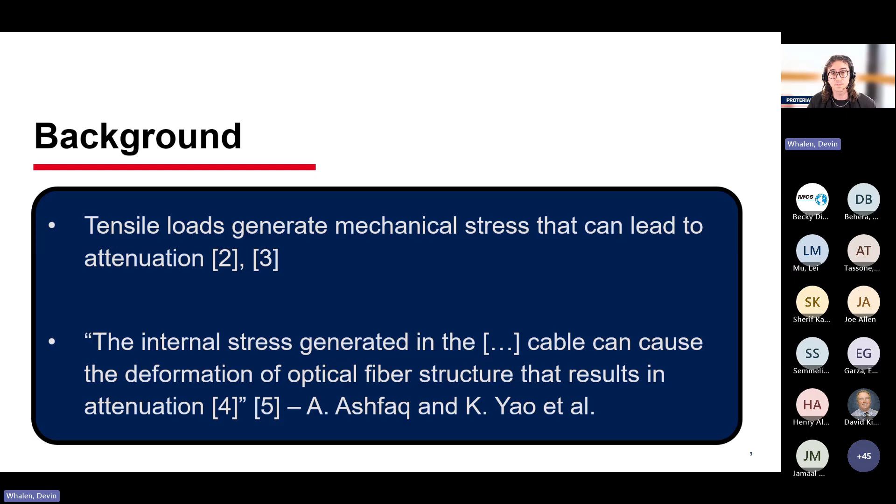Temperature cycling provides a useful stress case for modeling this stress. Reliable fiber cables all have to undergo temperature cycling without significant signal loss, so it's also just a very relevant process for producing good cable.

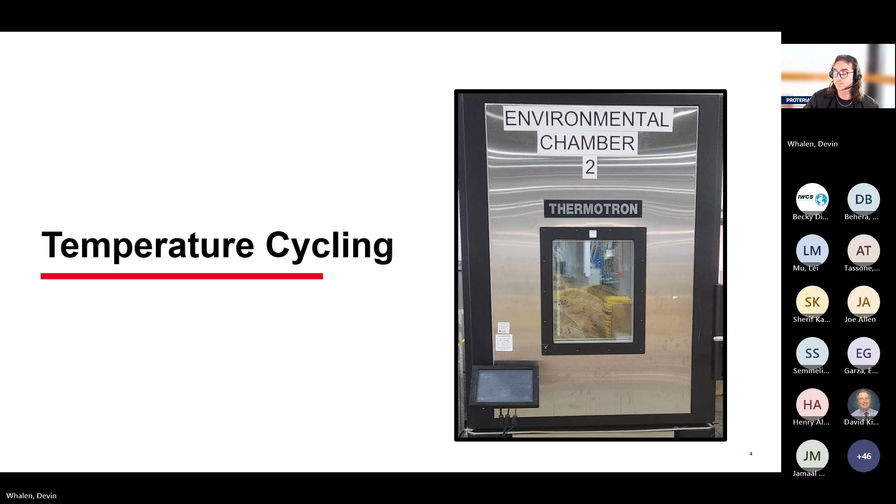As the temperature drops, the jacket will contract according to its coefficient of linear thermal expansion, or CLTE. Meanwhile, though, the silica fibers remain stiff, and as that jacket contracts, they get forced into contact with one another, as well as the aramid and the jacket wall. And as Ashfaq iterates here, those differences in CLTE between fibers and insulation create stress in the cable.

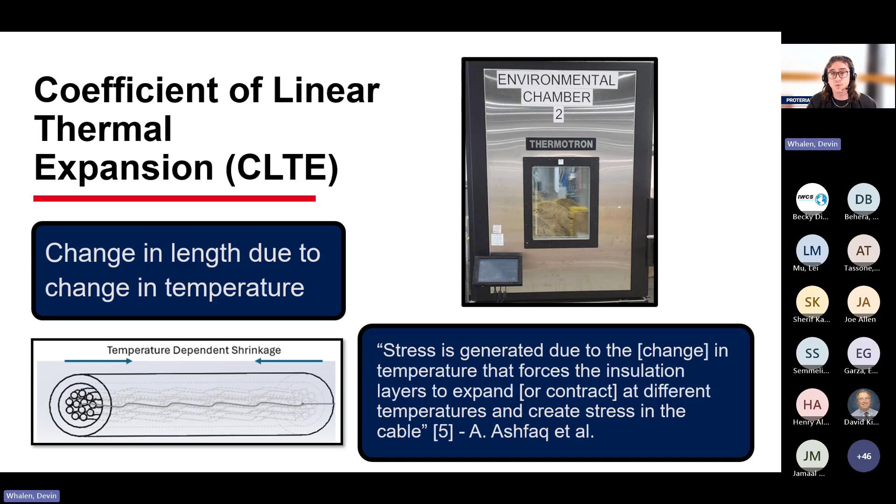This then leads into the next big factor, which is EFL, or excess fiber length. In loose tube fiber constructions, the fibers are pulled in alongside aramid yarn, and the tension that we put them under during this process influences how much slack they have. EFL is actually created when the jacket shrinks during cooling.

At Proterial, we measure EFL by bunching and clamping the ends of a longer 6-meter section of cable to keep the fibers locked in place. We then cut a shorter 3-meter section from the middle of this, ensuring to cut both ends at the same time, which keeps the fibers from biasing or contracting on one side versus the other. Once we've cut this smaller section, we remove the fibers from the jacket and measure how far past that 3-meter length those fibers extend.

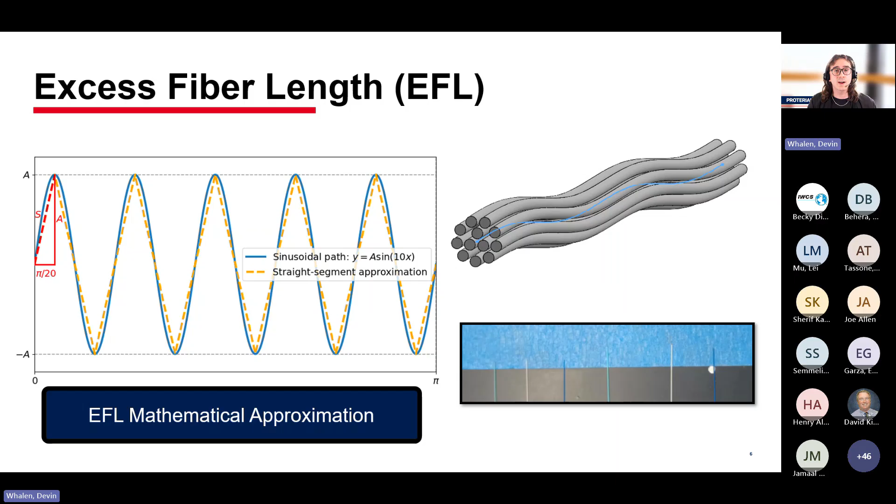In SolidWorks, we can model excess fiber length with an equation-driven line where the amplitude corresponds with the amount of excess length. You can see in the left-hand figure the straight segment approximation we're using to represent EFL. This isn't a perfect representation. In real life the fibers will exhibit out-of-plane oscillations and variation, but we did find that this is sufficient for comparing the relative impact of different EFLs.

This is important because the established theory is that a higher EFL correlates with a greater increase in attenuation during temperature cycling. That makes sense physically too: a higher EFL just means there's physically more fiber trapped in the same amount of cable volume as it's shrinking.

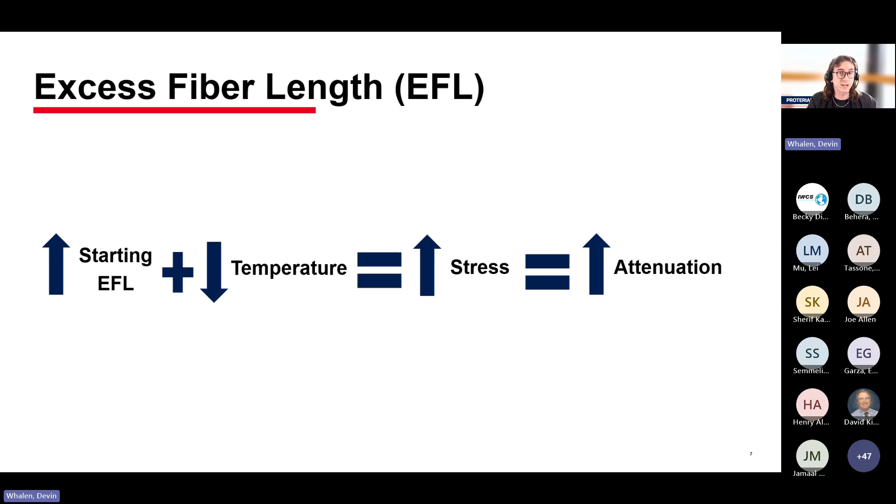Some work has already been done towards using SolidWorks to simulate the impact of EFL on loose tube fiber constructions. This study builds off previous work done by Henry Rice and Jacob Savoie. In that experiment, they demonstrated measurably higher fiber strain on a simulated cable with a higher EFL versus one with a lower EFL, and they also correlated this with two samples that they manufactured in real life.

While this was a good starting point, we really wanted to reinforce this relationship with a larger data pool. We also wanted to take a look at contact pressure as our key metric, because in SolidWorks, contact pressure is a measurement of the stress produced when two surfaces press up against one another, which is exactly what we're theorizing is causing increased attenuation—that it's really those stress hotspots driving attenuation.

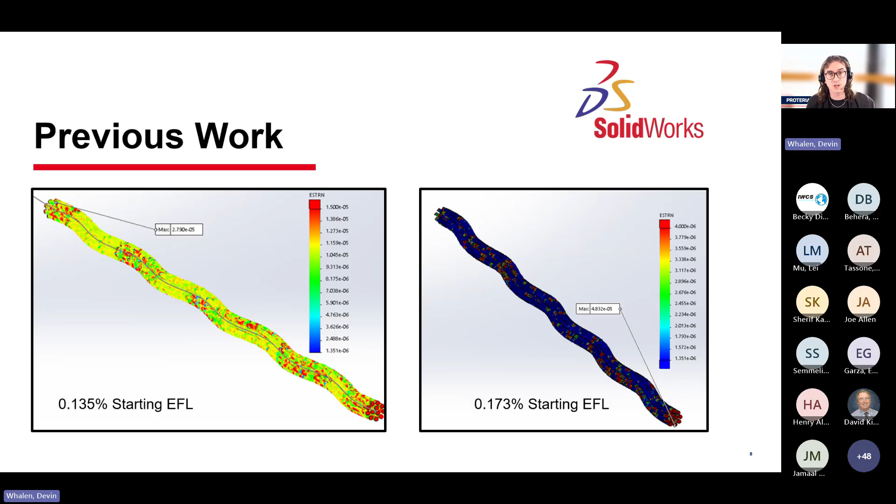So the project goals were as follows: first, to refine the existing model and evaluate its accuracy at predicting attenuation due to EFL; second, to apply the tool and predict attenuation in a new cable design, therefore reinforcing its value proposition.

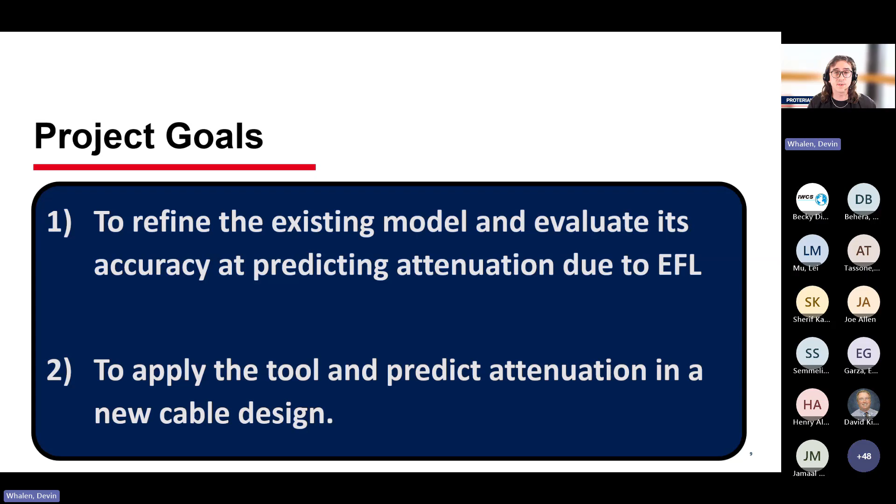Our initial approach to improving the simulation's accuracy was simply to increase its complexity. For example, in the previous study, each fiber was represented with only a single material, but in our updated simulation, we represented each fiber with three materials: a glass core/cladding, a softer inner acrylate layer, and a harder outer acrylate shell. That layered approach more closely resembles the actual construction of optical fibers, and at the time we believed it would result in a better representation of their mechanical response.

We also added aramid yarn to the model, which you can see in the figures there, represented as an extruded curved slot.

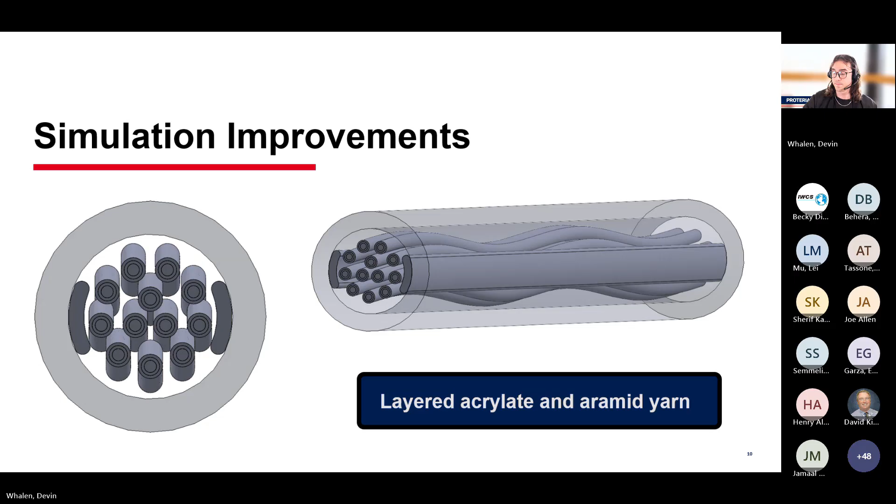We gathered the material properties for the simulation from a variety of research studies, manufacturer data sheets, and experimental measurements. CLTE specifically, since it was so important for this study, we measured experimentally by measuring the amount of shrinkage of a small 150 millimeter sample that we put in our environmental chamber and brought down to a temperature of minus 40 degrees Celsius.

One of the most significant improvements to the model was through the proper definition of contact interactions. In SolidWorks simulations, a contact interaction is what actually allows the virtual surfaces to press up against one another.

Conceptually, the simplest approach would be defining a contact interaction for each fiber in the 12 fiber set, contacting every other fiber in the set. But that approach falls apart for a couple of reasons. First, the number of contact interactions directly drives computational complexity, so we want to minimize them if we want our solver to converge in a reasonable amount of time. Second, SolidWorks doesn't allow for duplicate interactions, so if I have a contact set with fiber 1 contacting fiber 2, I can't have another set with fiber 2 contacting fiber 1.

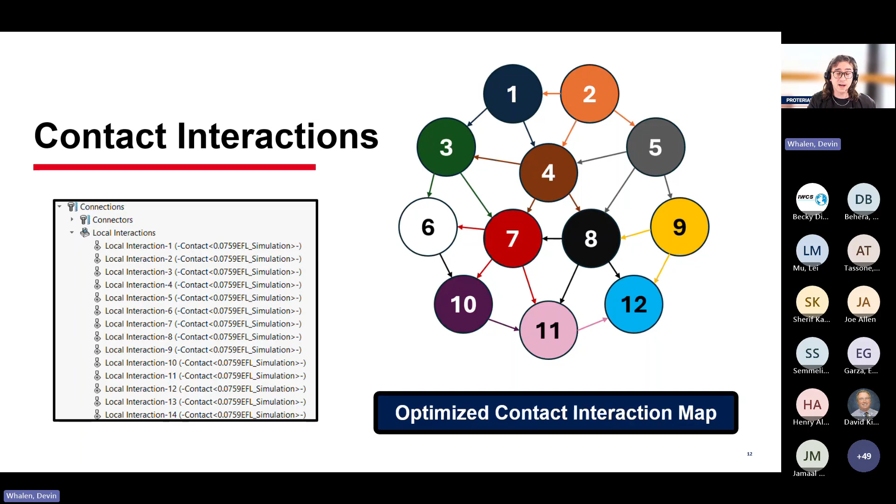It took a bit of iteration, but after some experimentation, we came up with an optimized approach to generating these interactions, and you can see the map that guides those decisions there on the right. They're not shown here, but in addition to those, we defined interactions between the fibers and the aramid yarn, and the fibers and the inside of the jacket.

So at this point, we thought we were moving in a good direction with the simulation. But while the simulation was significantly more complex than the original, it still presented several issues.

Even after reducing the mesh resolution, a single run required approximately 13 hours to solve, which is a long time, especially if you're trying to use this tool for iterative design. But even more concerning, the simulation was providing counterintuitive results in terms of the stress versus EFL relationship we were expecting, indicating the opposite relationship to what we knew was true. At the time, we interpreted this as a simulation artifact rather than an actual modeled physical effect, and began re-evaluating the constraints of our simulation.

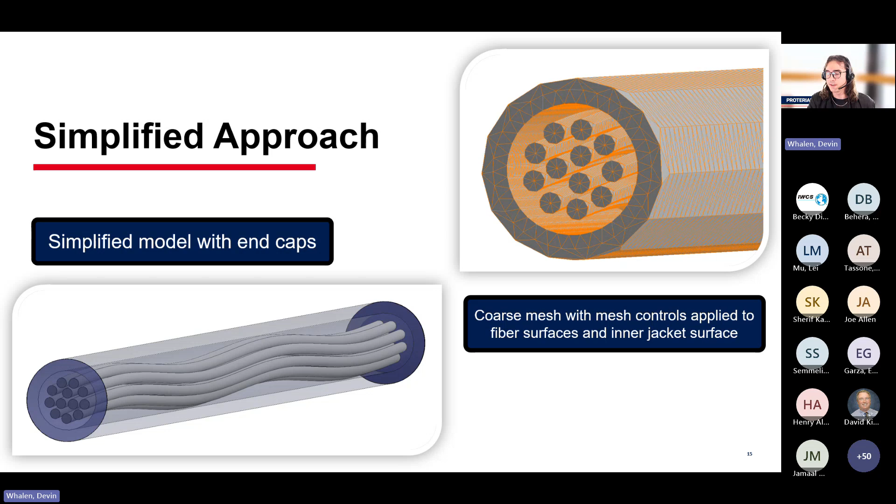You can also see the coarser mesh that we used there in the top right figure.

After setting up a working model, we set out to run an experiment to compare our simulated results with manufactured measured results. We again wanted to use a larger data pool, so we started by running 5 samples, and we varied the tension applied to the fibers between each sample to produce each with a different EFL. We selected multimode fibers for this experiment due to their sensitivity to bending, which makes them particularly suited for measuring the impact of EFL on attenuation.

Although the results for this experiment are all focused on temperatures of -40 degrees Celsius, because that's where the effects of shrinkage are the most pronounced.

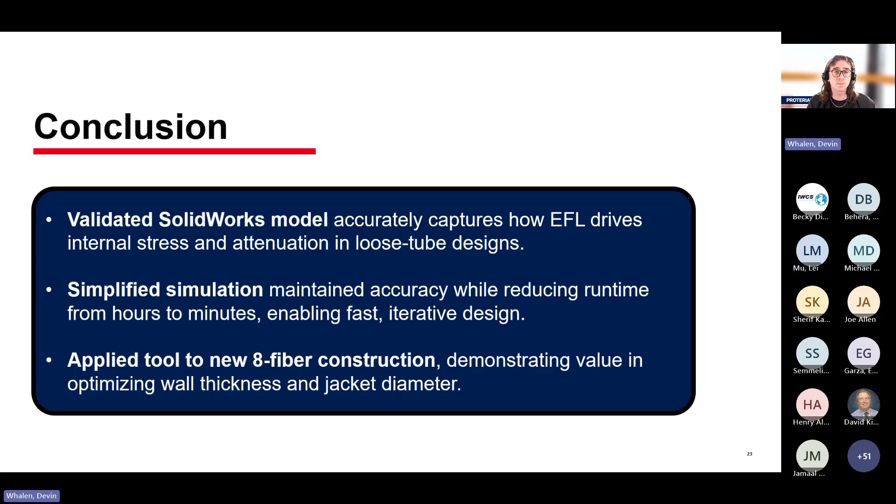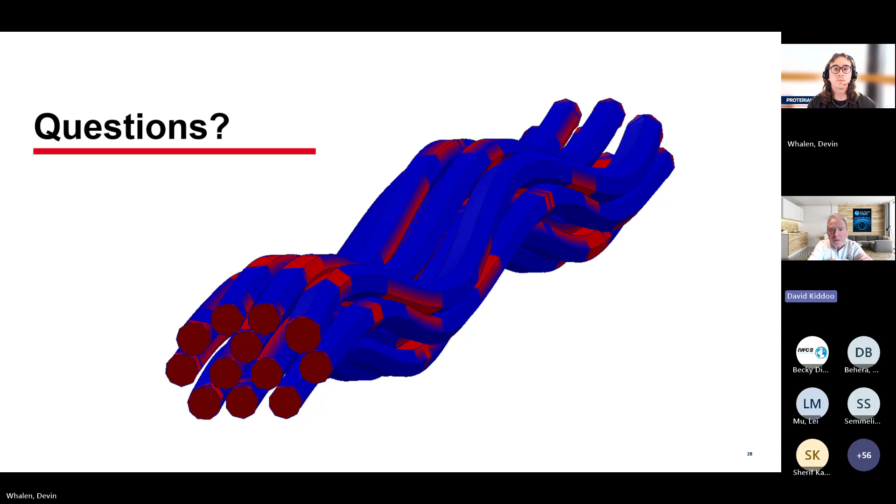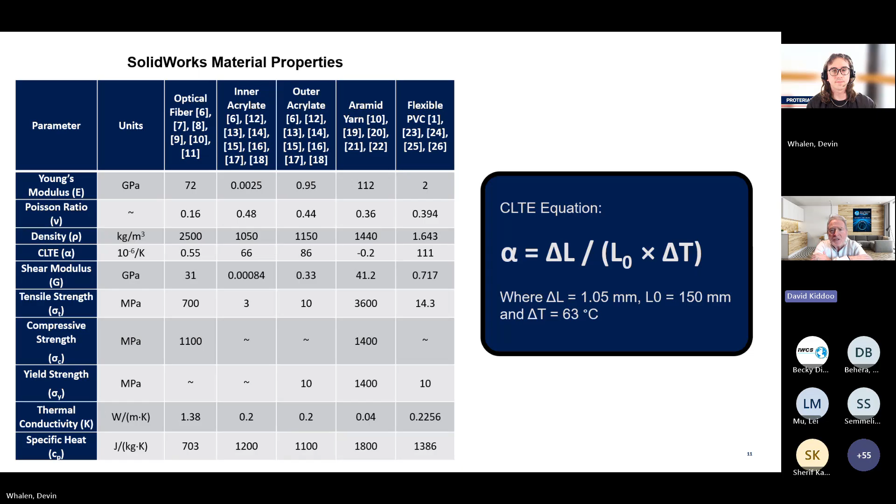Was an implicit or explicit solver used in the simulation? I believe it was explicit, but I'd have to double check that. There was definitely some tweaking of SolidWorks settings required to not only get this to solve, but to get five variations of it to solve with basic similar settings. I believe it was explicit, but I'm happy to follow up if anybody has specific questions, and share my settings as well.

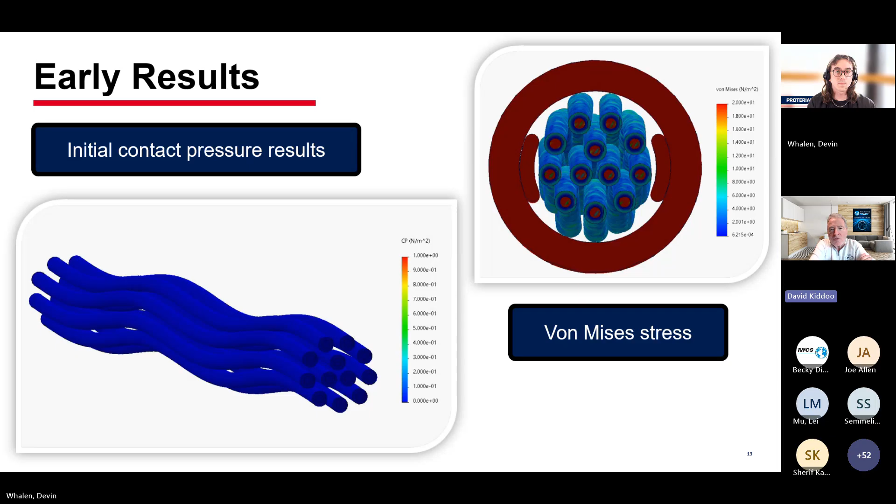Curiously, how is EFL applied -- in manufactured samples or simulated? In what context, quality control or manufacture? How do you best use these results in your simulations?

At least in the experiments, to get different EFLs -- and I know there's more advanced equipment for controlling the actual EFL, which we started to look into and just didn't get far enough with -- so for the sake of this study, we literally were just increasing and decreasing the tension that we were pulling the fibers in at to get different EFL. It's pretty well established that lower EFL is generally better, or rather zero EFL is what you want. So we were using the original EFL study to first confirm that was the case, and second it was a good test case to determine whether the model was actually representative of real world behavior. From this, we realized zero EFL is our best attenuation case. 80 grams corresponds with zero EFL, so we're going to use 80 grams going forward as our tension to achieve that EFL, and then use the simulation, now that we've established its reliability, to guide more useful design decisions like the diameter and wall thickness, etc. Does that answer the question?

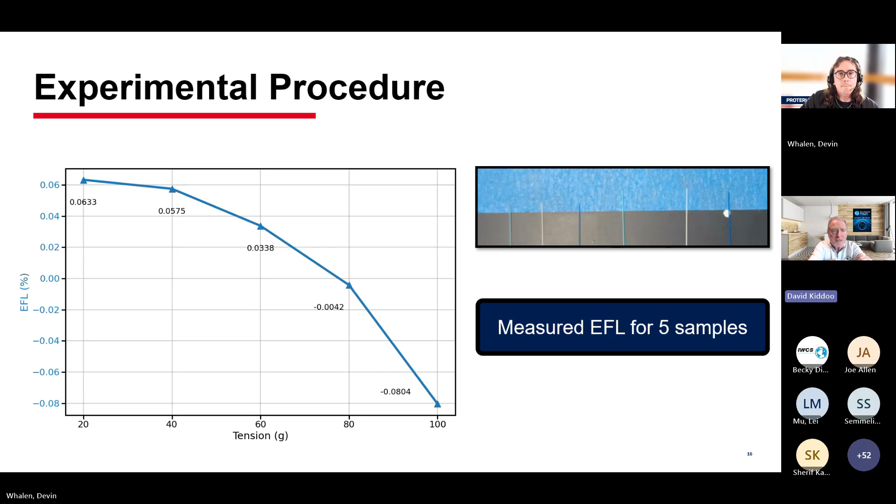Yeah, I think that is how you're using it in the model. What is the reason for the non-uniform behavior in the graph of attenuation versus EFL? I'm not quite sure if I understand the question.

The attenuation is the average attenuation that we measured, and the red dotted line is the simulated maximum contact pressure that we measured in our simulation. So they're going to be different, and obviously the scales here are adjusted. You're never going to match 1-to-1 with reality -- with a simulation, it's just never going to happen.

And that was a big lesson from this project too, was just how do you find the bare minimum that you have to do in the simulation world to get something that is predictive. It's not perfect, but from this we know that we can change certain parameters and we know that that's going to correspond with a change in the same direction in our real manufactured samples. If there's a question beyond that, reach out to me. But I think that probably addresses the question.

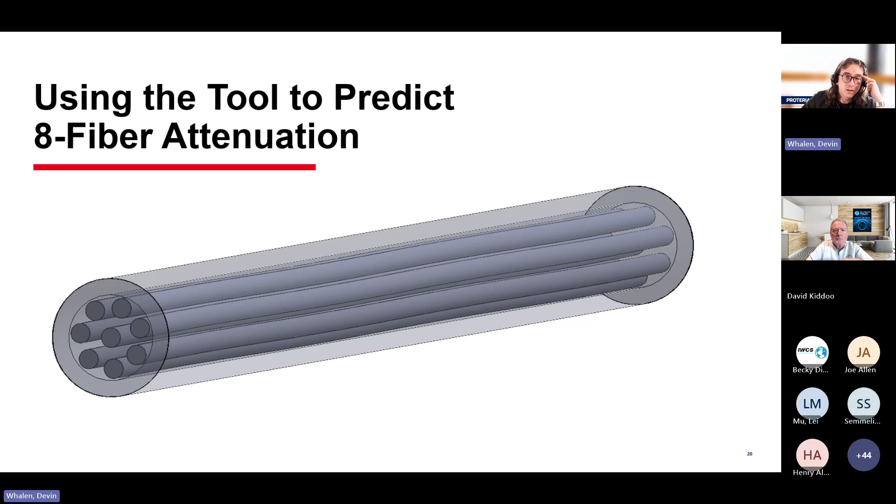A few more questions. What is the cable OD and ID for the 12 fiber case and the 8 fiber case? With the 8 fiber case, our original design is 1.44 millimeters. These are both 2 millimeter cables, and the inner diameter we reduced from 1.44 down to what you can see here in the figures.

Very good. Did you define the temperature history in the model, and if so, what is the temperature defined? I have maybe an idea of what this is referring to.

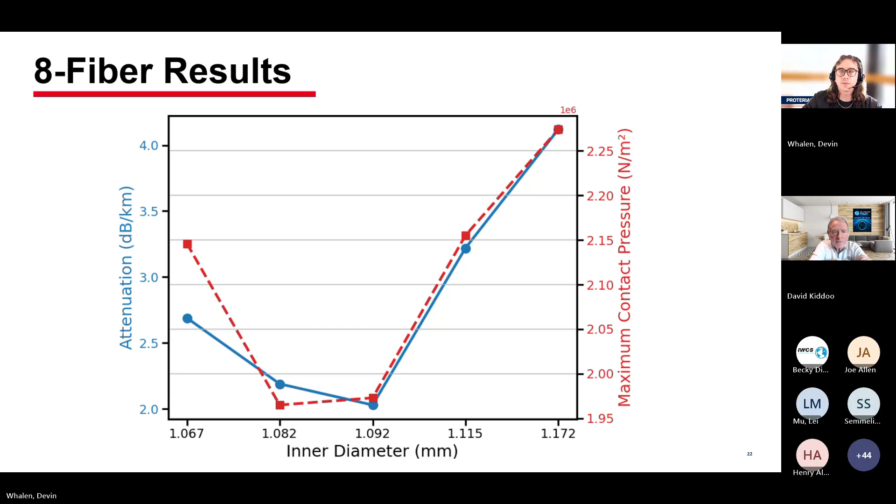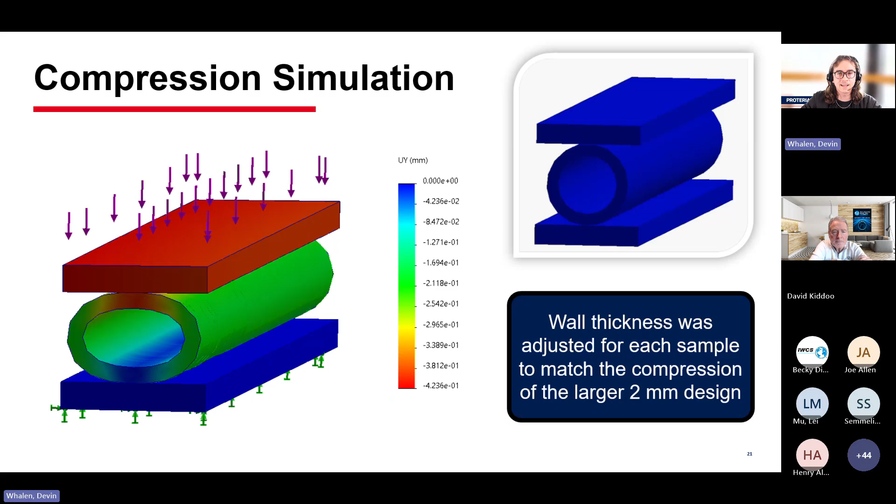This is a linear static study, which just means it's applying the temperature in a linear fashion. You enter a room temperature value—it doesn't have to be room temperature—you define a starting point and an end point, a temperature load, and it linearly interpolates between those two. There are a lot of other nonlinear tools you could use to make that more complex, but for the sake of this, it was just looking at that linear interpolation between room temperature and minus 40 degrees Celsius.

We've done a little bit of work since then, even within the material properties—things like the elastic modulus can change with temperature, and SolidWorks does allow you to define those changes. So you can say it's this at room temperature, and then at minus 40 degrees, it's this. Maybe that's what temperature history is referring to, but I would need more clarification.

As applied to real world cycling, and trying to see—I would imagine, yes, yes, yes. That's something we're kind of looking at. In our original study, I wanted to use, it would have been ideal, if we had that database of previous samples, so we could just pull that historical data.

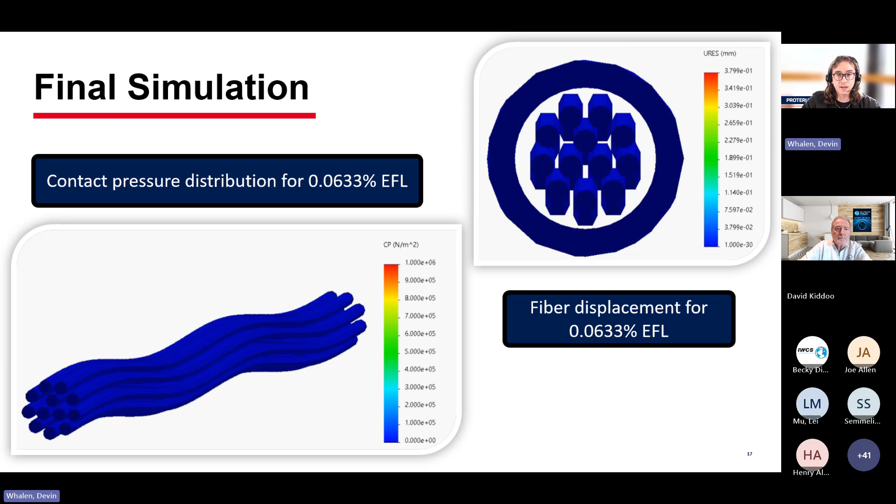We pulled essentially all of the fiber contact pressure data from each node, which you can see here, bringing that into Excel. The maximum contact pressure was literally the point that is the maximum of all that data. We did a little bit of filtering there, looking at P95, which is basically saying maybe not the very maximum point, but 95% of points were below this point, as well as cleaning off the ends, which had those exaggerated contact pressure right at the end.

So this is just looking at that single maximum value and comparing that with the attenuation that we measured on the real samples. I think there's a lot more statistical analysis you could do with this that just wasn't within the scope of this project. But what was within the scope was: here's what looks predictive with our first study, and then let's verify if this is predictive by using it to predict a new construction.

And finally, what was the biggest challenge in getting this simulation methodology to work reliably and repeatably? That harkens back to several things I talked about earlier, but with simulation, it's never going to one-to-one match reality. So figuring out what things were necessary and what things could go while still producing a predictive model.

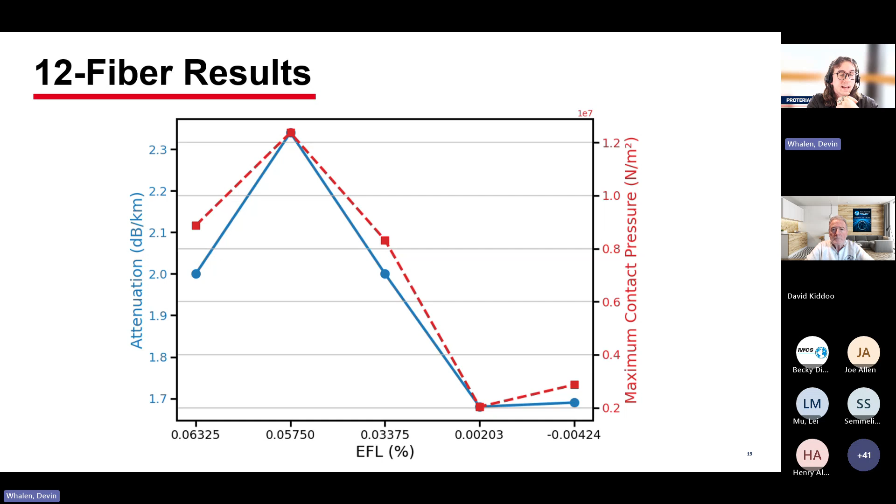Because something we ran into was when you have loose bodies in SolidWorks, they become extremely sensitive to things like the geometry and the mesh resolution. Especially with lower resolution meshes, you might have a sharp corner somewhere that pokes into another body in just the wrong way and causes the model to not converge, or to solve with equilibrium errors. So finding all the settings where we could run five different simulations with slightly different geometry and have them all converge with exactly the same settings was for sure a challenge.